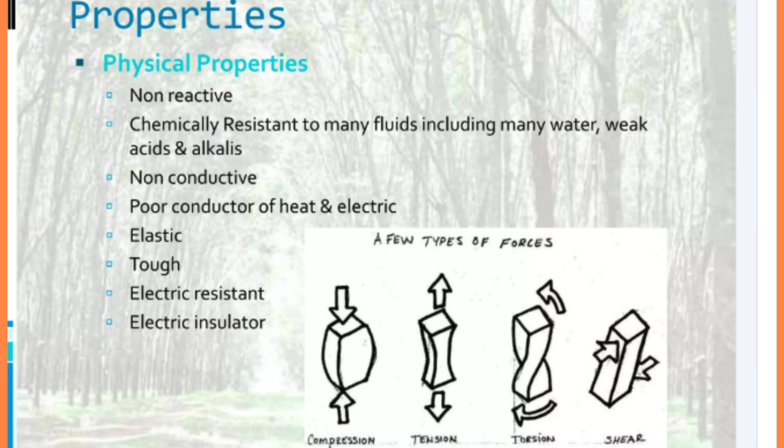प्रॉपर्टीज ऑफ रबर की। तो सबसे पहले इट इज अ पॉलीमर कंसिस्ट ऑफ आइसोप्रीन मॉलिक्यूल्स fitted together in loose chains consisting long chains of one or more type of molecules, that is chemical property. It contains long chains of hydrogen and carbon molecules, यानी कि जो रबर होता है इसमें it has long chain of hydrogen and carbon molecules.

Rubber goes through vulcanization through adding sulfur, which results in hardening of the rubber. It is a durable material with great mechanical properties.

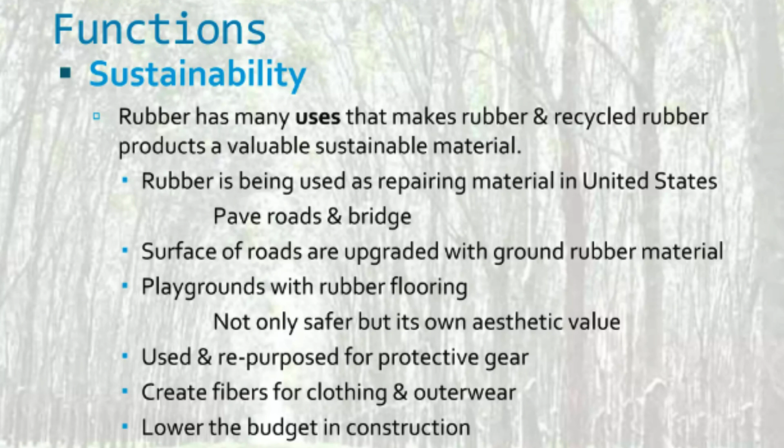As rubber recycling has become more common, it has found more wide application, and it does not go waste. There is market demand which keeps vast amount of rubber out of landfills.

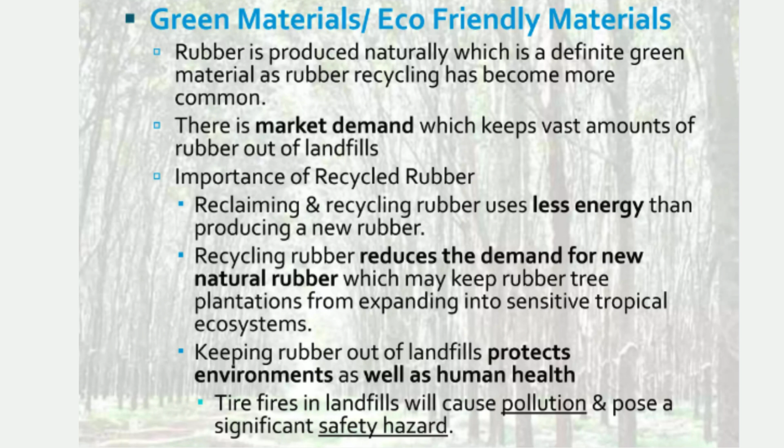So recycling is very popular. Recycling rubber reduces the demand for new natural rubber, which may keep rubber tree plantations from expanding into sensitive tropical ecosystems. Keeping rubber out of landfill protects the environment as well as human health. Tire fires in landfills will cause pollution and pose a significant safety hazard. So that's why these tires are generally mostly recycled. So the environmental damage is also restricted to a certain extent.

Then discussing the aesthetic value of rubber: rubber can be obtained in different types of color. It has a great eye appeal. It is easy to shape, hence allows designers to create seamless installations. It has safety, it is comfortable and hygienic, and it can also be engineered with antimicrobial properties.

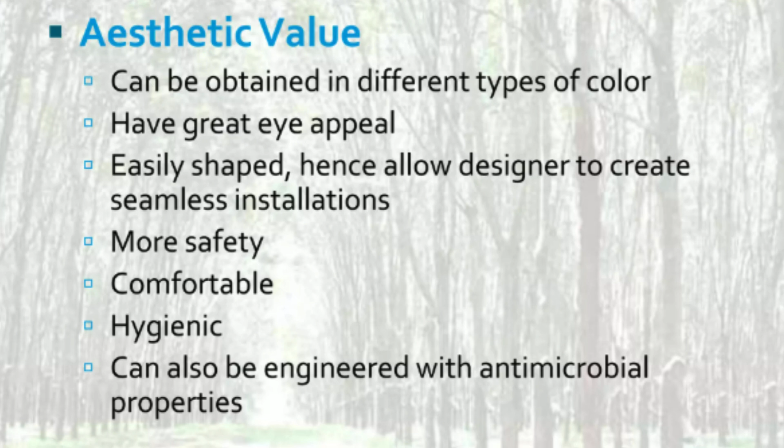Now let us discuss the durability of rubber. So first thing is vulcanization. What is vulcanization? Basically, vulcanization is a process of forming cross links between polymer chains in the rubber. So what is the benefit of vulcanization? The formation of the cross link chains makes the rubber more durable. So it is less sticky and more durable.

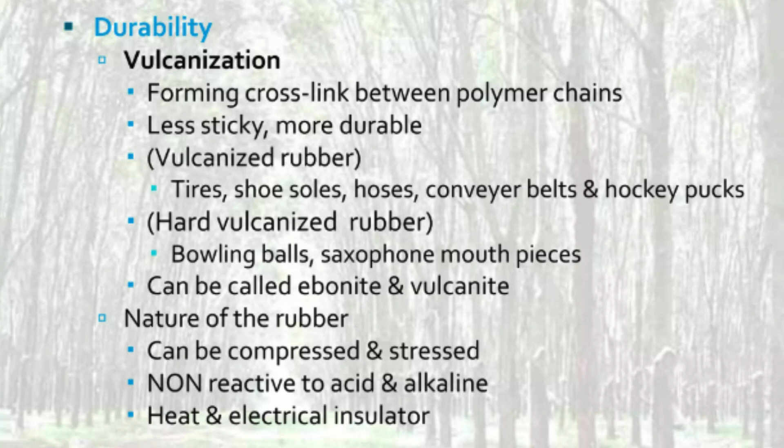What are the applications of vulcanized rubber? Vulcanized rubber finds application in tires, shoe soles, hoses, conveyor belts, and hockey pucks. Then, hard vulcanized rubber finds application in bowling balls and saxophone mouthpieces. It can be called ebonite and vulcanite. Natural rubber can be compressed and stressed. It is non-reactive to acid and alkali, and it is a great heat and electrical insulator. So these are some of the applications where rubber finds its place after vulcanization.

Now let us discuss the advantages of rubber. Basically, there are six advantages listed here. First is durability, second is environment friendly, third is water resistant, fourth is it is soft, fifth is it is fire and burn resistant, and sixth is it is a sound absorber. So now let us take them one by one.

First is durability. Rubber is very durable. It is strong and resilient against a variety of atmospheric conditions, acids and bases. It can last longer if proper care is taken. It has a long life. Now discussing the environment friendly property of rubber. It is recyclable and it is a better choice since it consumes less energy during the recycling process. Moreover, the basic raw material for manufacturing is obtained from nature.

It is water resistant, so non-porous and does not contain water within itself. It is soft to touch. It relieves stress and fatigue associated with standing or walking for long periods, and it can be used as a safety material for manufacturing various items for children. It is fire and burn resistant. It is not toxic and will not release noxious fumes into the air when there is a fire.

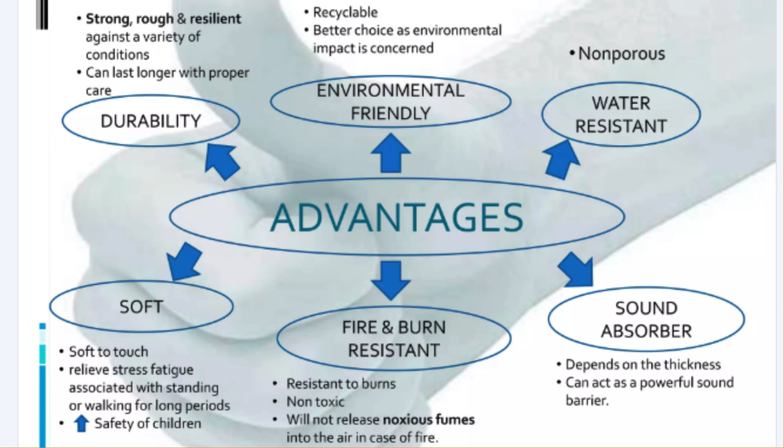It is a sound absorber. It dampens the sound. Depending on the type of machinery, various thicknesses of rubber pads are used as sound absorbers to reduce noise pollution in buildings and surroundings. So these are some of the advantages of using rubber.

Now let us discuss the disadvantages of rubber. There are four disadvantages. First is expensive. Second is odor. Third is high maintenance, and fourth is staining. It is expensive because rubber is a natural material produced from trees, so there is a limit to what can be obtained from nature. So it has high initial cost. Recycling rubber is cheaper, but manufacturing the rubber for the first time has high initial cost.

Second is odor. It has a very distinct odor that isn't pleasing to everyone, but it dissipates during the course of time. Then high maintenance: dirt builds up easily on the rubber, that is, dust sticks on the rubber, and it should be properly cleaned at regular intervals. Otherwise, rubber will be damaged. And staining: although rubber is resistant to most staining agents, there are still some agents which cause staining.

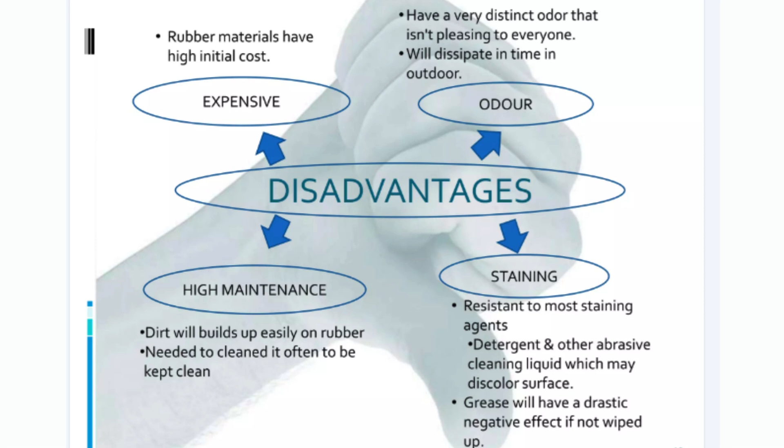Detergent and other abrasive cleaning liquids decolor the surface of the rubber. Grease will have a drastic negative effect on the rubber if it is not wiped up or cleaned as soon as it sticks to the surface. So these are some of the disadvantages of the rubber.

Now talking about the application of rubber. So in building industry, rubber is most widely used as a flooring material. It is used for making the floors. Used to large extent in public and industrial buildings because of their good wearing qualities, resilience to various chemicals, and noise or sound insulation. So because of these properties, they find application on the floor.

Made up of pure rubber mixed with fillers such as cotton fiber, granulated cork, or asbestos fiber, and desired coloring pigment, they give attractive appearance to the floor. Manufactured in the form of sheets or tiles in a variety of patterns and colors. Generally, for the purpose of the flooring, rubber is manufactured in the form of sheets and tiles, and they have various patterns and colors to give an attractive appearance to the floor.

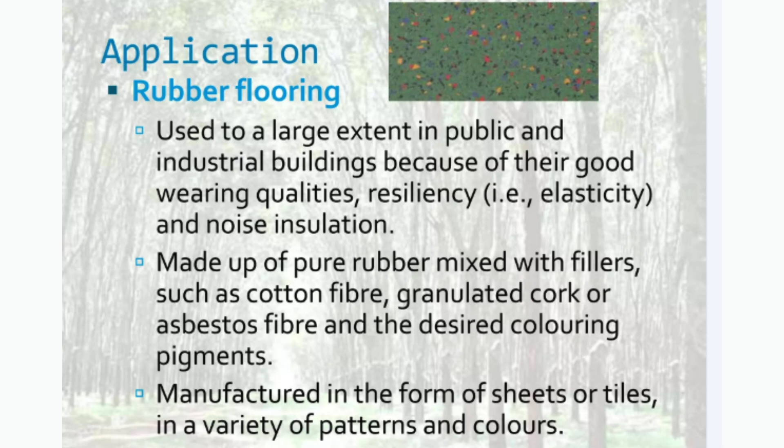So, in this photograph, you can see various applications where rubber is put to use.

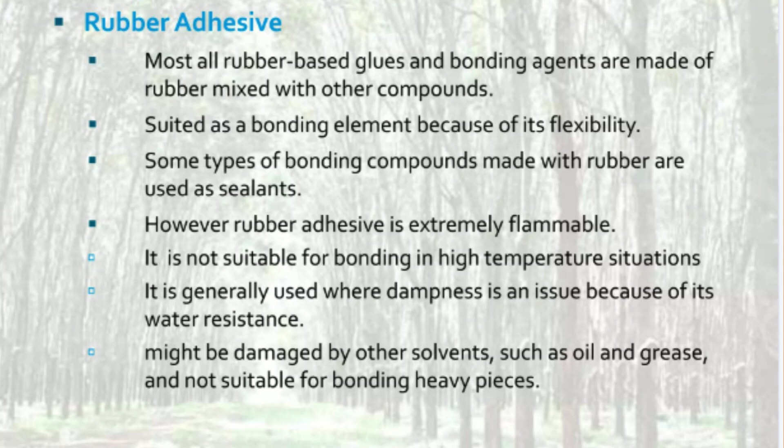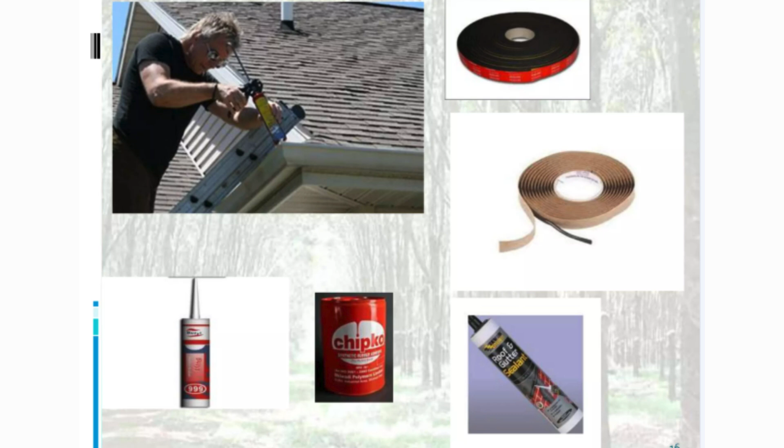However, rubber adhesive is extremely flammable. It is not suitable for bonding in high temperature situations. It is generally used where dampness is an issue because of its water resistant property. It might be damaged by other solvents such as oil, grease, and is not suitable for bonding heavy pieces. So these are some of the uses of rubber as adhesives. You can see here in this photograph, rubber is used as sealing agent and adhesive to stick the surfaces.

Now coming to the next property, that is bearing pads. So hard rubber or flexible rubber both are used depending on the type of application for bearing pads. It is used extensively in standard construction applications, buildings and structural steel bearing applications. Synthetic fibers are added to the base rubber compound to create an internal stiffening like steel reinforced concrete. This mesh structure delivers enhanced tensile and compressive strength, stiffness, tear resistance and durability. So this is very suitable for making the bearing pads.

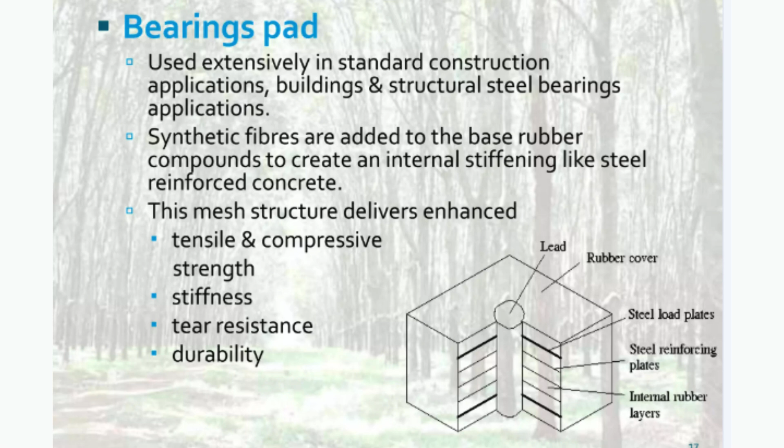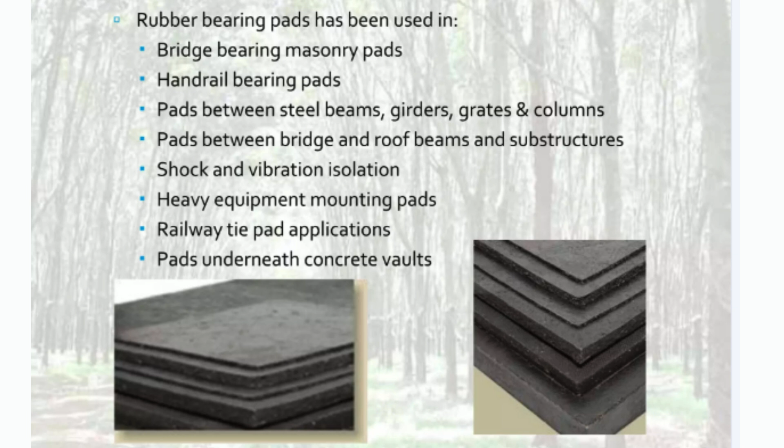Rubber bearing pads have been used in bridge bearing masonry pads, handrail bearing pads, pads between steel beams, girders, grates and columns, pads between bridge and roof beams and substructures, shock and vibration isolation, heavy equipment mounting pads, railway tie pad applications, pads underneath concrete vaults. So these are some of the places where the rubber bearing pads are widely used.

Moreover, rubber finds its place in expansion joints of the buildings also. A mid-structure separation, designed to relieve stress on building materials caused by building movement. This building movement is the result of thermal expansion and contraction caused by change in the temperature, sway caused by winds and seismic events.

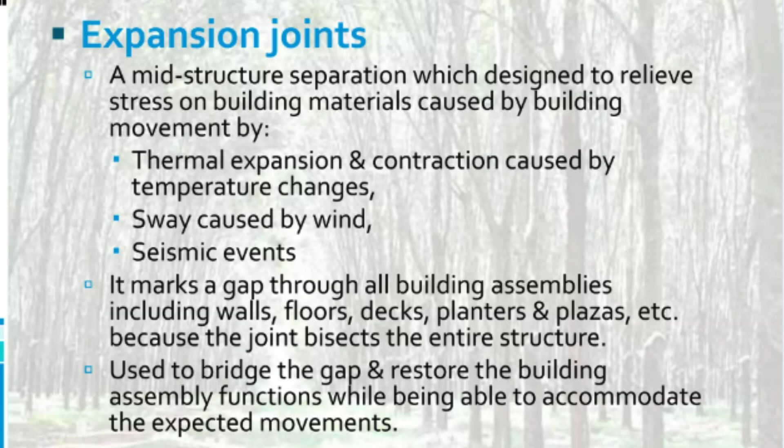It marks a gap through all building assemblies, including wall, floor, decks, planters, plazas, etc., because the joint bisects the entire structure. It is used to bridge and restore the building assembly functions while being able to accommodate the expected movements. So these are some of the applications of the rubber in expansion joints.

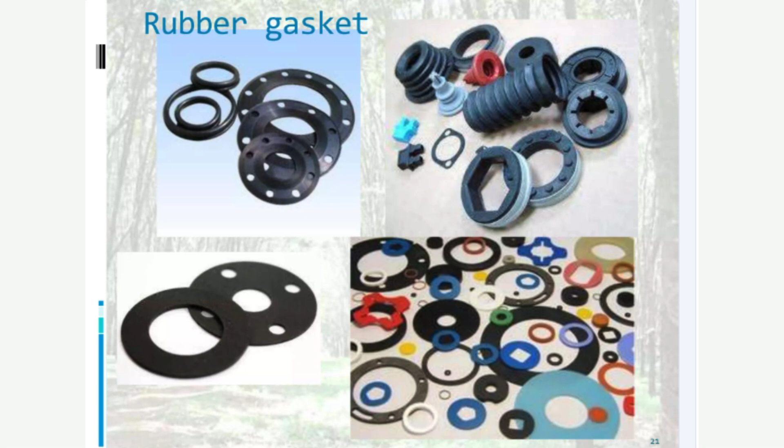So you can see some of the bearing pads, sealing agents. These are some of the rubber products which are widely used in various industries. These are the grips which are used for sealing purposes, that is rubber gaskets. So a wide range of products can be made from rubber for the building construction industry.

So now concluding this discussion on the rubber, both natural and synthetic rubber are widely used in construction industry. Not only in construction industry, they are used in household and industrial projects also. Many products used as household items and in industry are manufactured from rubber. Therefore, rubber industry has a bright future, and rubber finds a wide range of applications.